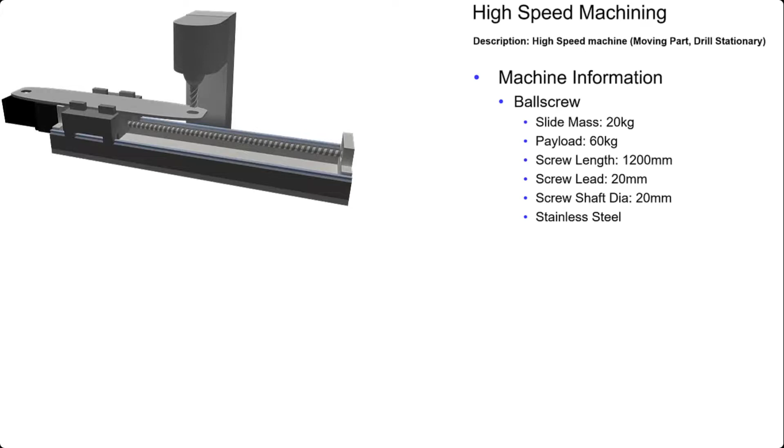Here's a quick preview. We're going to walk through sizing a ball screw for a simple milling machine. The ball screw specifications and motion profiles have been defined and can be loaded into the Sigma Select software to find the best motor for this application. Now let's take a look at this in a little more detail.

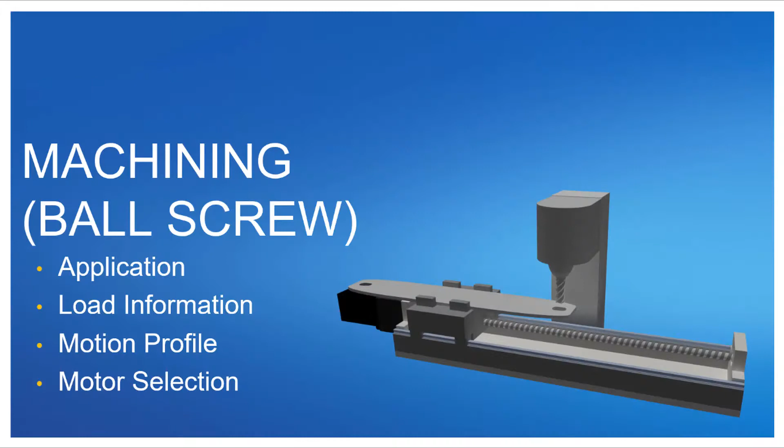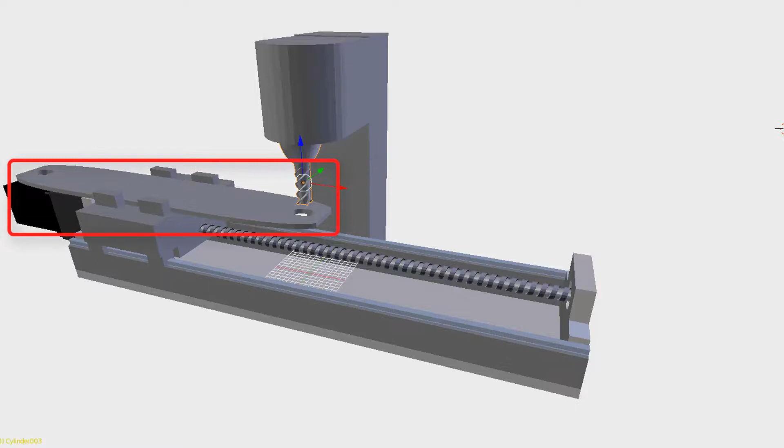At this point, I assume that you have watched the following videos that introduce you to the sizing concepts and software. Here's a visual representation of a simple milling machine. The machine consists of a rotary milling head, vertical adjustment actuator, and a linear ball screw. The part is initially loaded onto the ball screw and then lined up for milling the first slot.

The rotary milling head moves down into the part, and the ball screw moves to the right slowly to cut the first slot. The milling head then lifts out of the part, and the ball screw positions the part for the next slot. The second slot is drilled just like the first, and then the part is lifted off the machine, and a new part is put on. The finished part consists of 2 milled slots, one on each end.

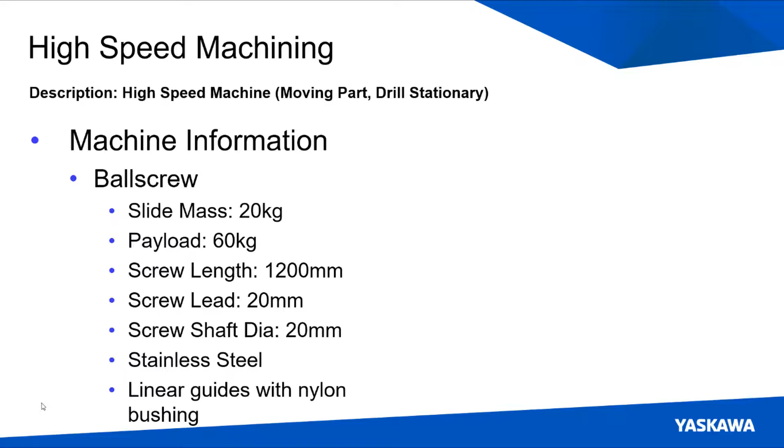So what size of motor is required for the linear ball screw? The load characteristics and motion profile for this axis are both important. The following specifications have been obtained for sizing the ball screw motor only. The vertical motion and rotary drilling motion are not being sized within this video.

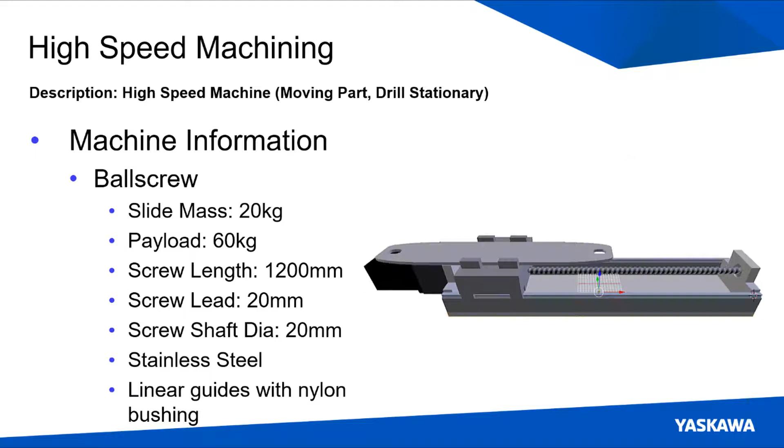Looking at the linear ball screw, it consists of a 20 kilogram slide assembly, which includes a jig to hold the part to the ball screw. The metal part being cut has an overall mass of 60 kilograms. The screw itself is 1200 millimeters long and 20 millimeters in diameter with a 20 millimeter lead.

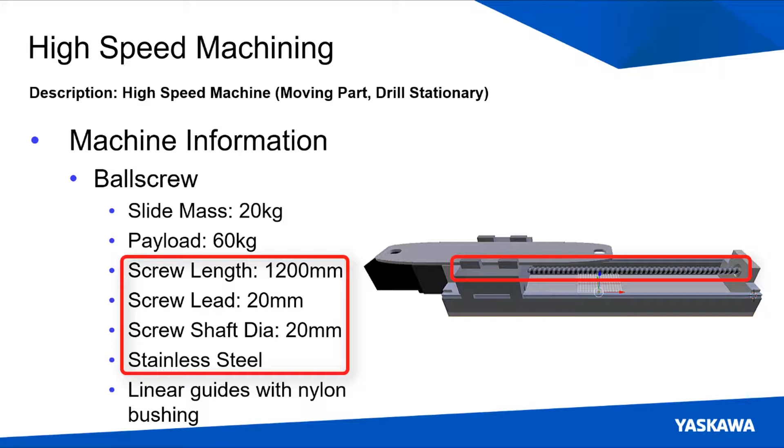The motion profile can be split into 7 sections. 3 of these sections are dwell sections to allow the mill to move into or out of the part. 2 of the sections consist of cutting 3-inch slots into the material. 1 section traverses the bit from the first slot to the second slot. The last section is a dwell to allow the part to be removed.

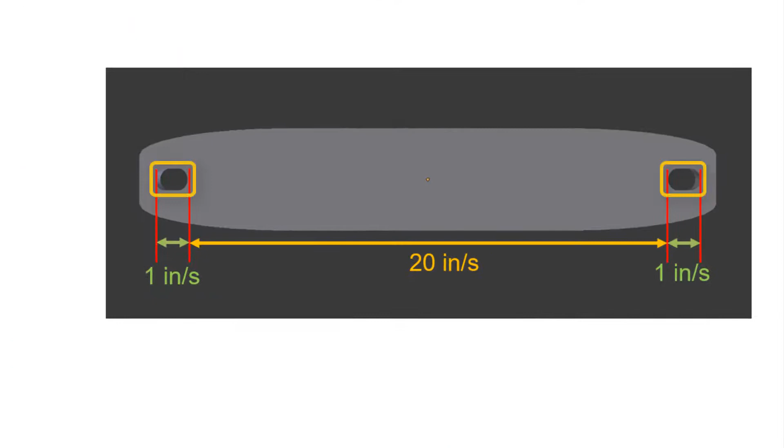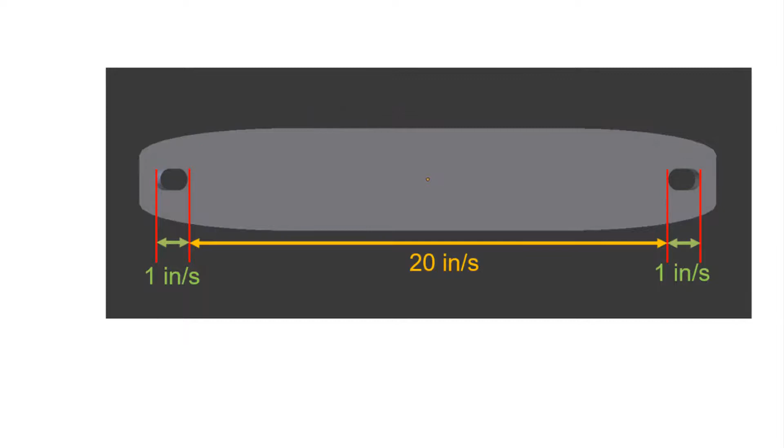Looking at the 2 cutting sections, the ball screw needs to apply a constant cutting force of 700 pounds onto the material, which in turn means that the screw cannot move faster than 1 inch per second. Moving faster could result in breaking the milling bit. During the traverse section, the ball screw can move at 20 inches per second.

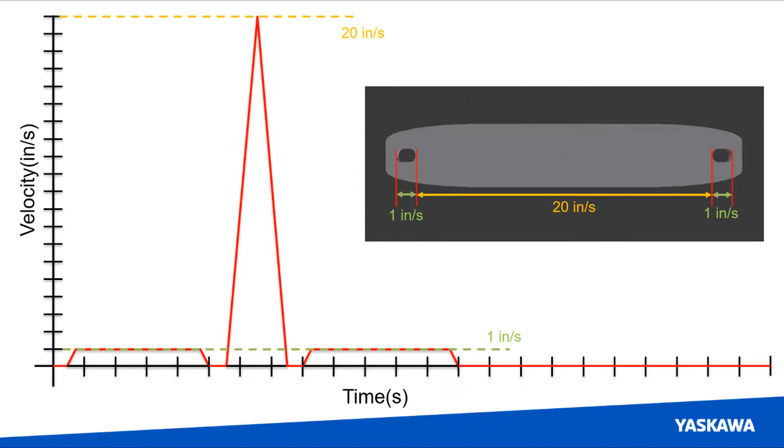Let's start sizing the motor by opening the Sigma Select software. For this example, I will be using version 1.0.8.3. To start, I have already filled out the user information section. In the Load Editor tab, we can start filling in some required information.

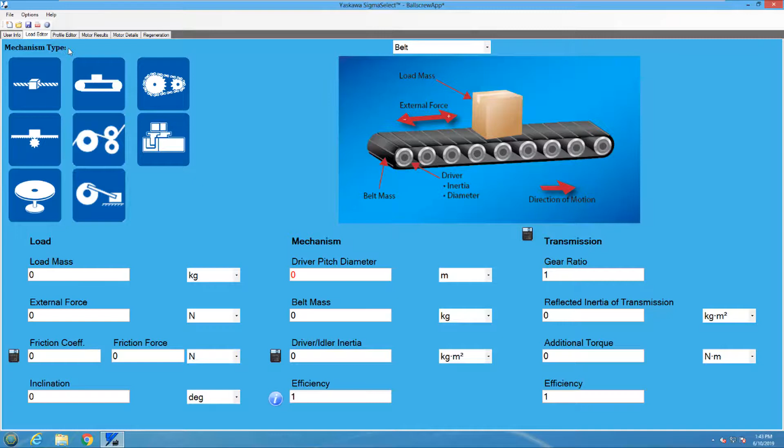First of all, what mechanism are we trying to size the motor for? In this case, it will be the ball screw portion of the milling machine. So I will select the ball screw icon from the left side. Let's look into some of the load info. First in this section is load mass. What should be entered here?

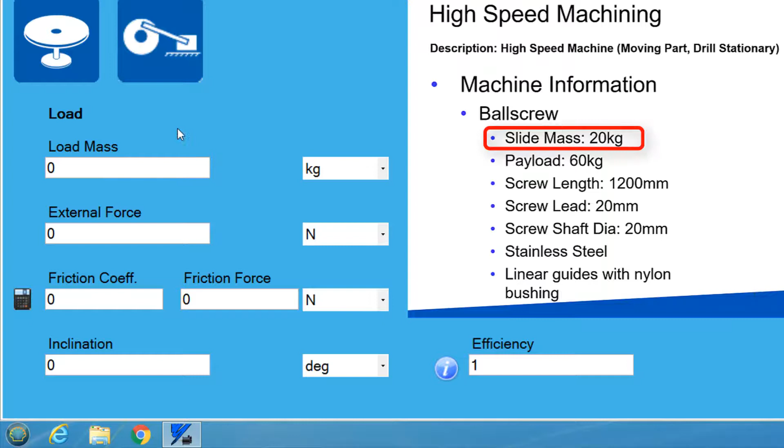Well, looking at the application information, I see the ball screw has a 20 kilogram slide that is moving a 60 kilogram piece of metal. So I will put the 60 kilogram mass in because that is the load. Moving down, let's consider what external forces may be present.

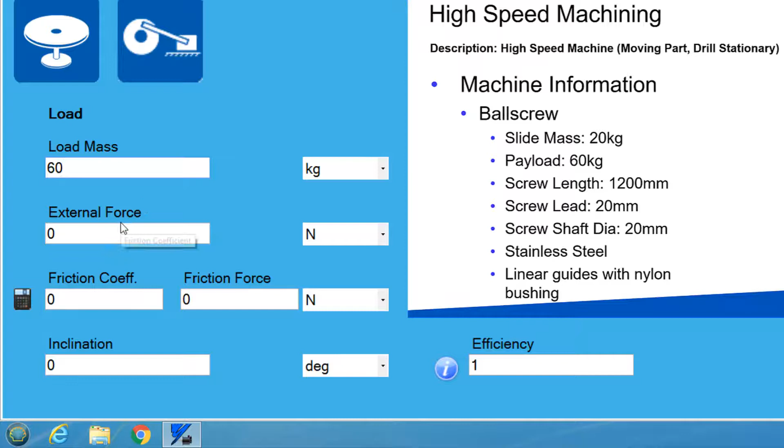This load does have external forces, but looking at the help file, the external forces on the ball screw are not constant. The cutting force only occurs when the bit is cutting the metal part. So this cutting force is not recognized here, but will be added when it comes to creating the motion profile.

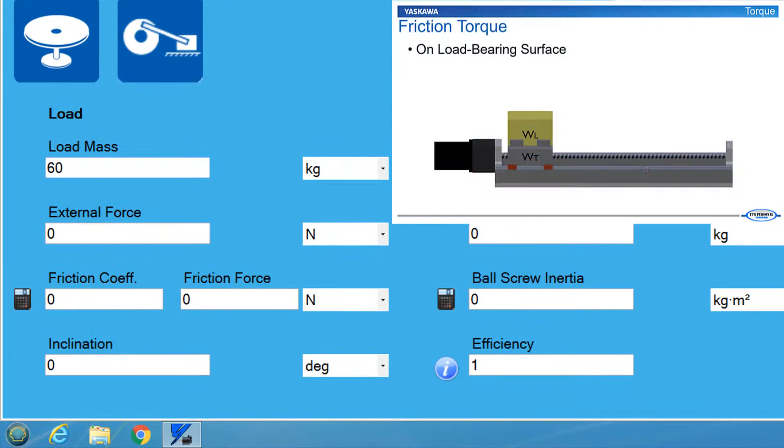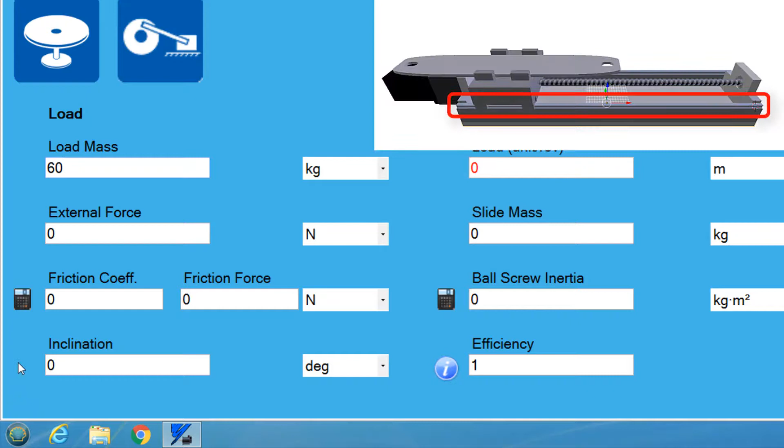When it comes to friction force, we are looking for items in between the load and the mechanism that may cause constant resistance depending on the load. In the ball screw, there is a friction force occurring in the linear guide portion of the ball screw due to the slide bearings. This force is added by selecting the friction coefficient calculator and selecting linear guide with nylon bushing under the mechanism menu. Since the ball screw is mounted horizontally, we don't have to worry about setting the inclination.

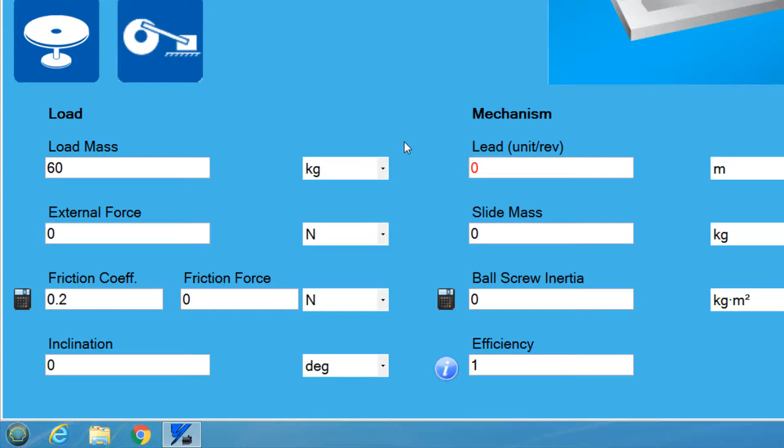Now that the load is defined, the next step is to fill in the mechanism properties, which are defined by the mechanism type that was selected earlier. The ball screw lead is the translation value for the ball screw to turn rotary motion into linear motion. In this case, the screw lead from the spec sheet is 20 millimeters. The slide mass is just the mass of the slide moving on the screw, which is 20 kilograms.

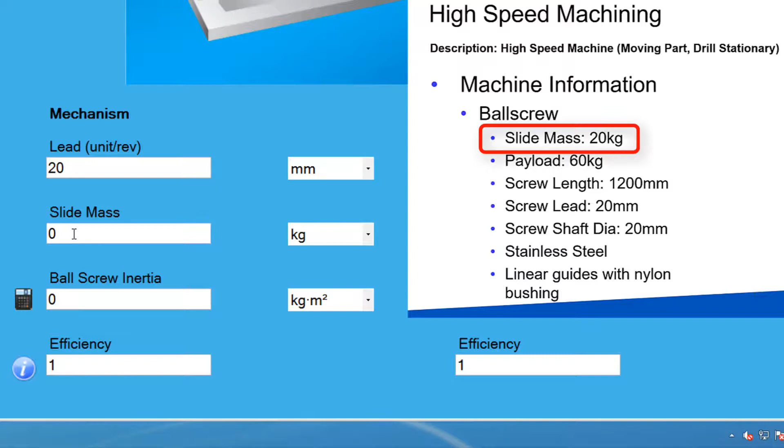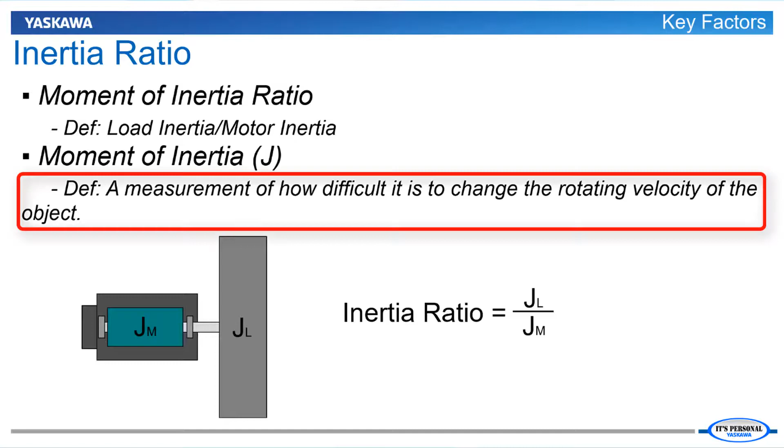Now for the ball screw inertia. If you remember from the servo sizing basic concept video, the moment of inertia is a measurement of how difficult it is to change the rotating velocity of the object. In this scenario, we're looking for the inertia of the ball screw, which is the rotating part of the mechanism.

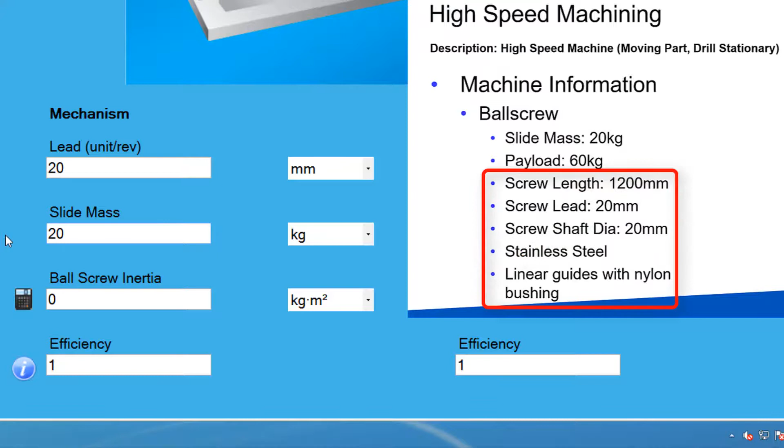The specification from before does not list the inertia directly, but we know the material and dimensions. These can be used in the Inertia Calculator. The Inertia Calculator takes a user-defined model of the screw and calculates the inertia of the defined models. In this case, the screw is the only component that needs to be added.

I'll set the label to screw and set the type to cylinder. There's only one screw in the actuator, so the quantity will be 1, and there are no transmission components being used, so that will stay at the default also. Looking at the diagram, the screw needs to be modeled in the vertical orientation. From the ball screw specs, the length is 1200 millimeters, so the height is 1200 millimeters.

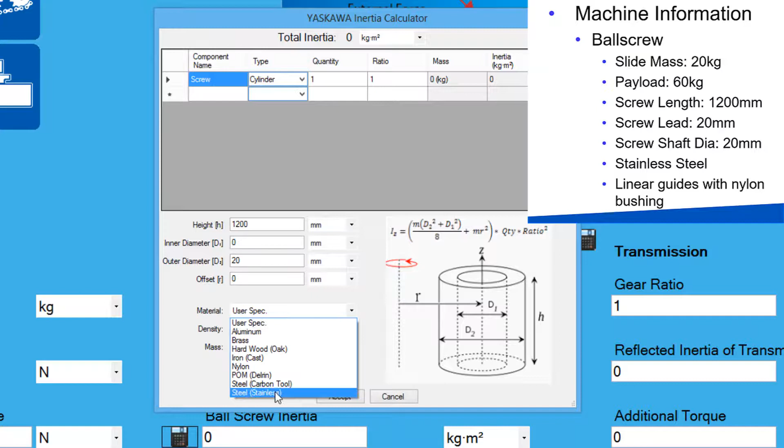Normally ball screws are not hollow, so the inner diameter is 0. The outer diameter from the spec sheet is 20 millimeters. The offset is 0 because the screw is rotating around its own axis. Predefined materials are available from the material drop-down. This ball screw is made out of stainless steel. If the materials are not available in the drop-down list, the density and mass can be defined by the user. The inertia for the ball screw has now been found.

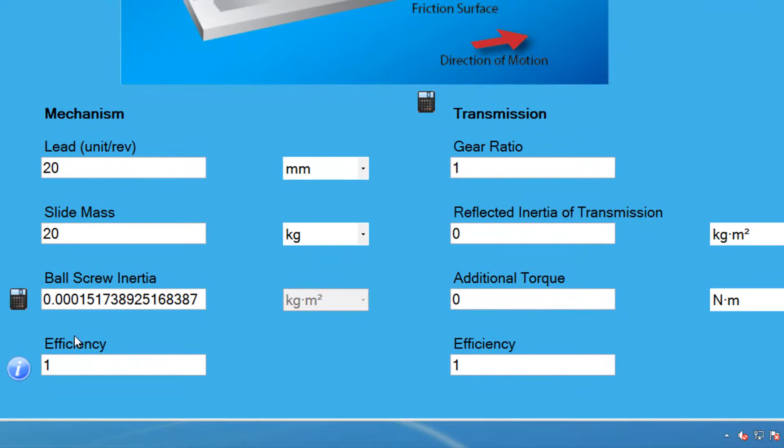Moving on, the normal efficiency of the ball screw can be seen by selecting the Info button. According to the chart, ball screw mechanisms can be 85 to 95% efficient. The manufacturer may publish a more precise value, but this is usually sufficient for sizing purposes. So I will use 90% for my efficiency.

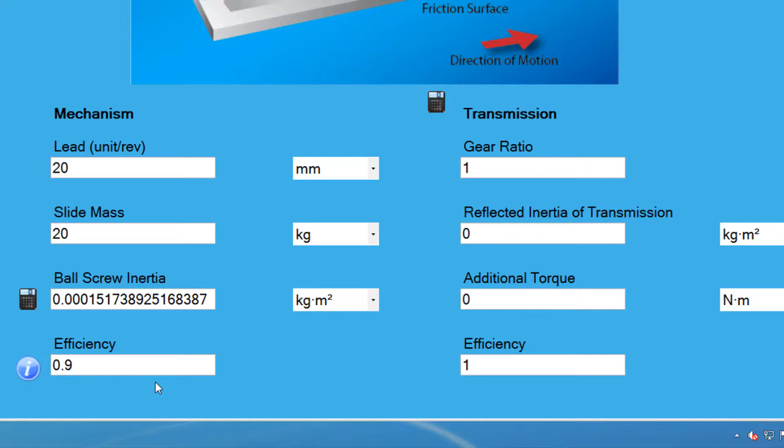The ball screw is connected to the motor via a coupling, which needs to be added in the transmission section. To start, let's select the calculator icon. Inside, we are going to add a coupling, and then set the inertia for the coupling. The coupling that will be used is 60 millimeters in length, and 38 millimeters for an outer diameter. The inner diameter is 20 millimeters to match the ball screw diameter. The inertia has been found for the coupling.

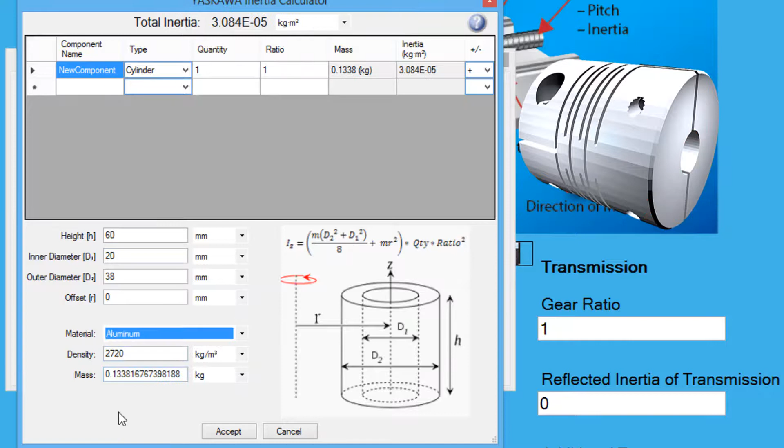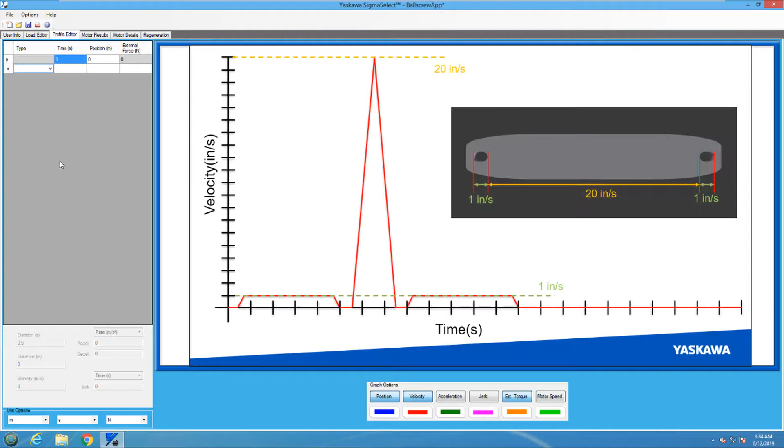Let's move on to the profile editor. Now we need to move the information from the Move Profile, shown earlier, into the Profile editor. To make sure that the correct units are used, I need to set the unit options to inches, seconds, and pound force. The first section is a dwell for 0.5 seconds. Then comes the first slot, which will be a trapezoidal move.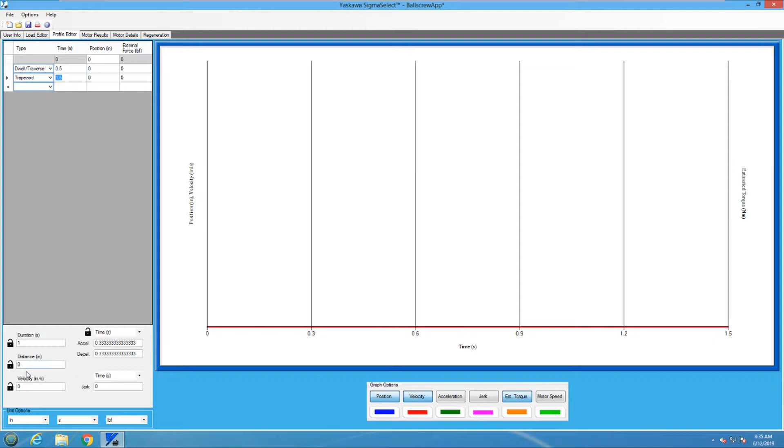This cut is 3 inches long, and the screw can travel no faster than 1 inch per second. Here's where we need to put the external cutting force. It needs to be negative because it is acting against the ball screw. Next we have another dwell for the bit to come out of the part. Then the transfer move, which is going to be a triangular move over 20 inches at 20 inches per second. Another dwell for 0.5 seconds.

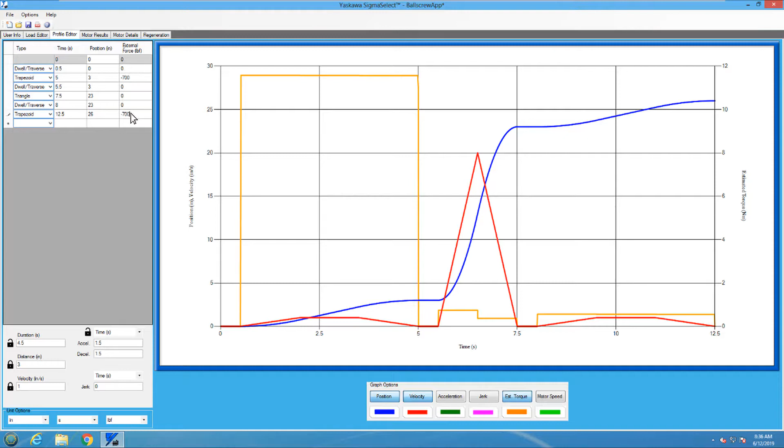Then the second slot, which is just like the first one. So 3 inches at 1 inch per second with negative 700 pound force. The last section then is the extended dwell for bit removal and part removal. Let's make this 10 seconds. Now that the motion profile is finished, a motor can be selected from the motor results page.

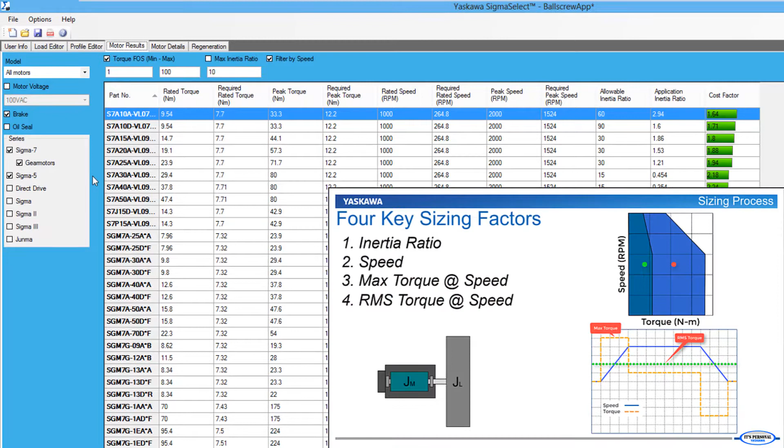When selecting a motor, the following 4 key sizing factors need to be taken into account: inertia ratio, speed, max torque at speed, and RMS torque at speed. For this application, let's use the Sigma 7 non-gear motor. Looking at the non-gear motors in the list, I want to find a motor that satisfies all 4 of the key sizing factors.

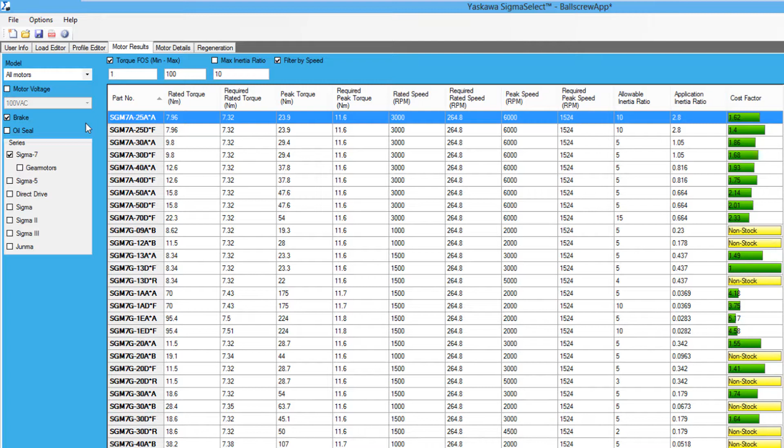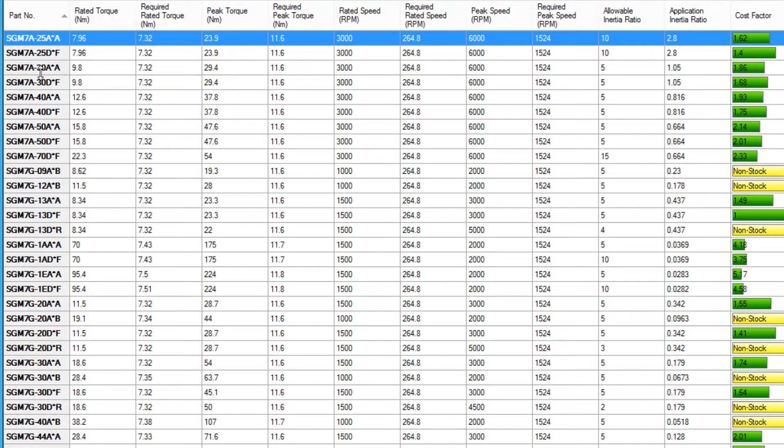The SGM7A-25A motor fulfills all 4 of the key sizing factors, but a rule of thumb to use when sizing is to make sure that the required torque does not exceed 80% of the rated and peak torque values. This allows a buffer if the customer specifications are a little off. The SGM7A-30A motor appears to have rated and peak torque values 20% above the required torque, so let's select the SGM7A-30A motor.

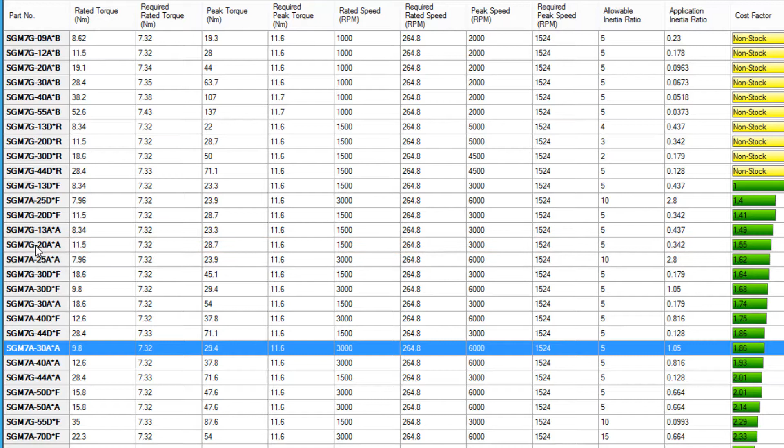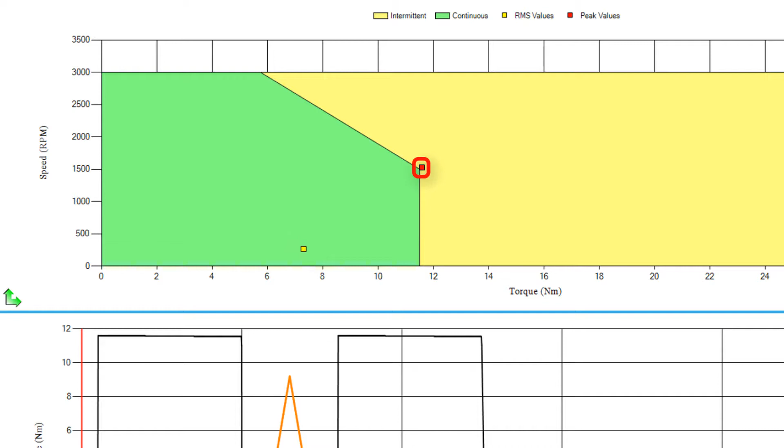Other secondary factors also need to be considered, like cost. Sorting the list by cost, it appears that the SGM7G-20A motor is cheaper to buy and still fulfills the key factors. Let's select both motors for right now. In the motor detail screen, I will look at the SGM7G-20A motor first. Looking at the speed/torque graph, the RMS torque value lies in the continuous region, and the peak torque lies in the intermittent region. This satisfies 3 out of the 4 key sizing factors.

Looking at the motor detail area, the inertia ratio falls underneath the allowed inertia ratio of the servo motor. If you remember from the previous sizing videos, the lower the inertia ratio, the better the motor will be able to control the load. So this motor's inertia ratio satisfies the last key factor.

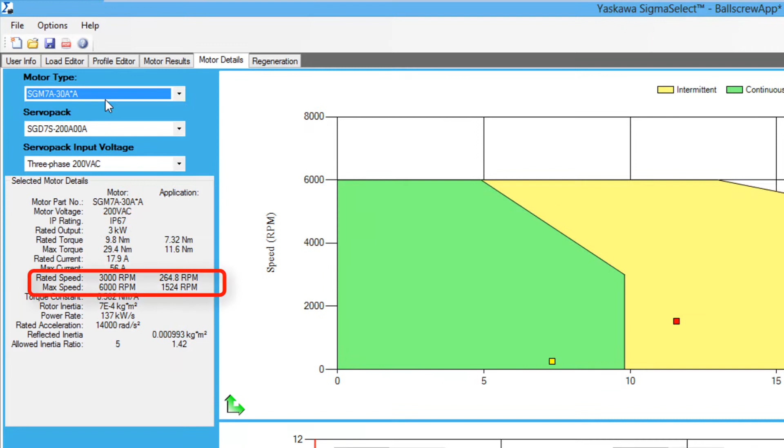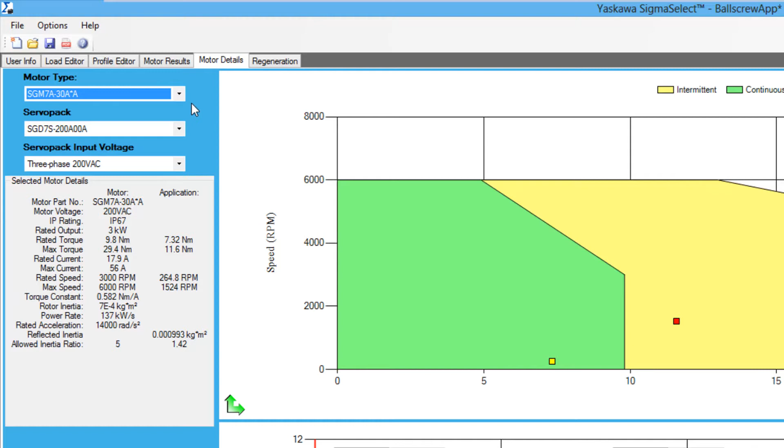How is the SGM7A-30A motor different? First of all, it has a max speed of 6,000 RPM and a rated speed of 3,000 RPM, because it is an A motor versus a G motor. The inertia ratio for both motors is low, so this is not a concern. Because the application operates at a lower speed, the high speed characteristic of the A motor is not required.

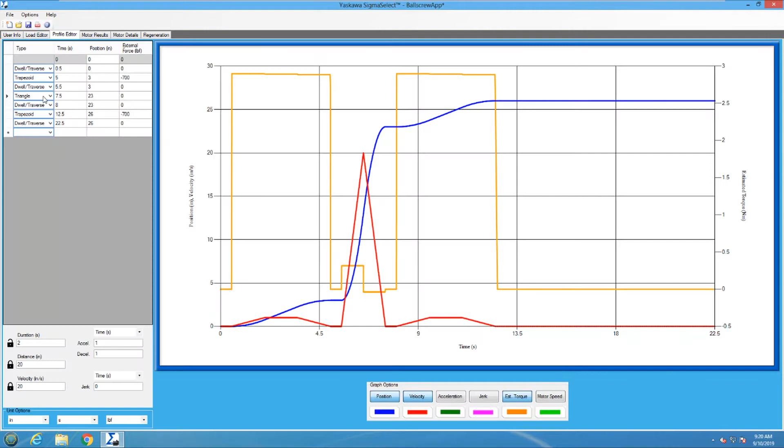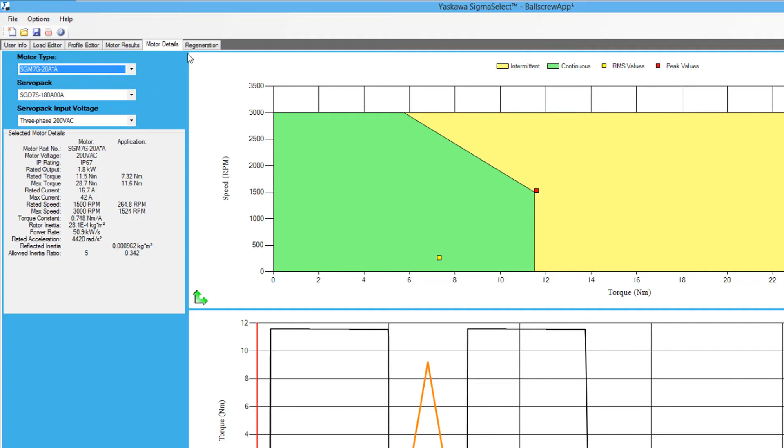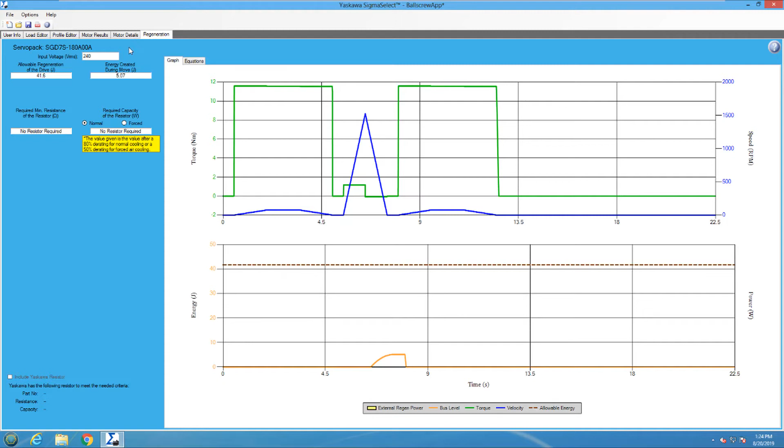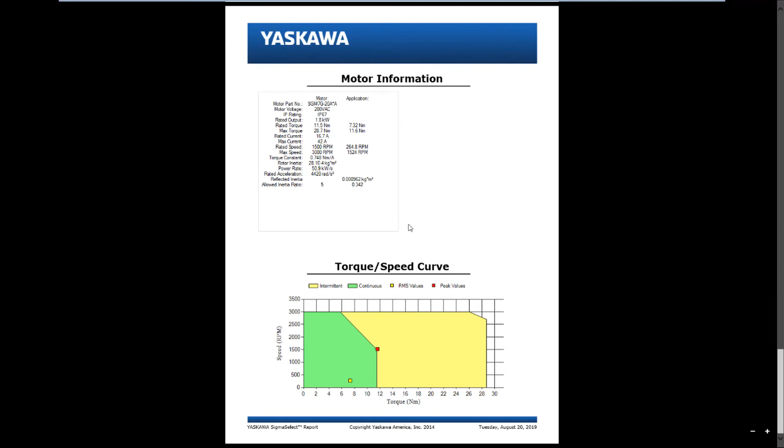The sizing is now complete and a sizing report can be created. The report contains all of the information that was used to size the motor along with the motor specs of the selected motor. The SGM7G-20A motor will work for running the linear ball screw of the multi-axis milling machine. This concludes the ball screw sizing application.